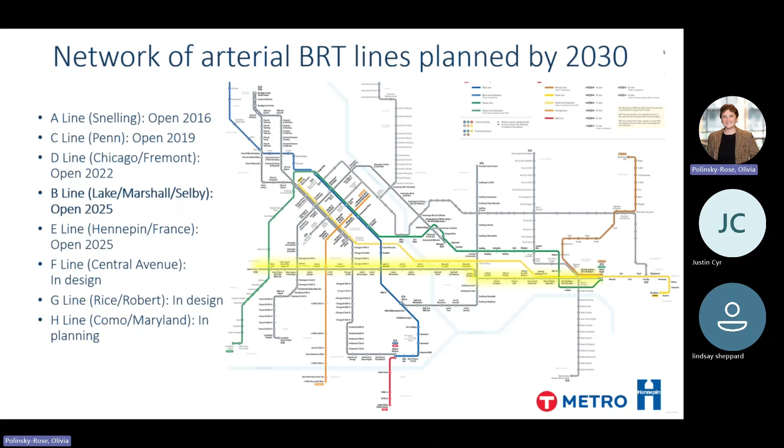You're probably familiar with Arterial Bus Rapid Transit, or ABRT, but here's a quick overview: a network of high frequency, high quality transit, improving service on our highest ridership corridors. The B Line is our seventh BRT route. It opened in June of 2025, connecting to an additional 7 metro routes, including the Green and Blue Lines, the E Line that opened in December, and more. ABRT improves our local service by increasing the space between stops, with 2 to 3 stations per mile, so you're stopping less frequently, spending more time moving and less time at each stop.

We implement comfortable stations that have shelters with light and heat. They have seating, real-time information, which helps people—makes your wait feel shorter when you know when the bus is going to come. And then we have off-board fare collection and nearly level boarding, along with all-door boarding, which allows people to walk right onto the bus, again contributing to less time stopped, more time going.

In addition to all of that, we work with our local partners, such as Hennepin County, to implement transit signal priority along the routes and bus lanes where possible, again helping to keep us out of traffic and keep both traffic operations and transit moving smoothly, getting everyone where they need to go more quickly.

The B Line improves service on what was our highest ridership local route, Route 21. It had been at about 7,500 riders per day. It's increased by more than 20% since then—definitely over about 8,200 riders per day since I last checked, and probably even higher since then.

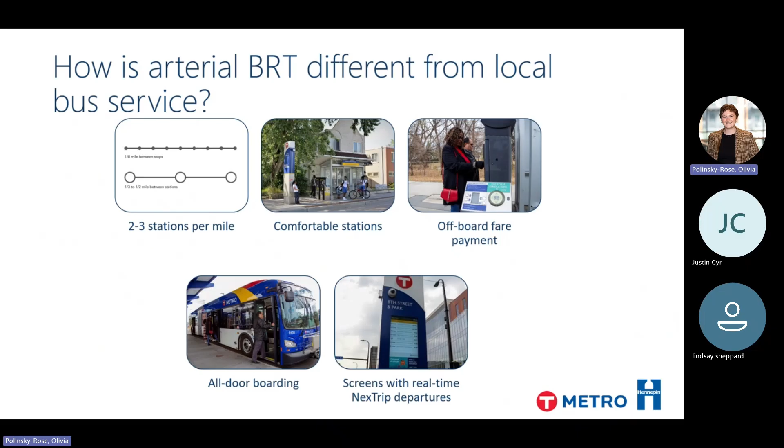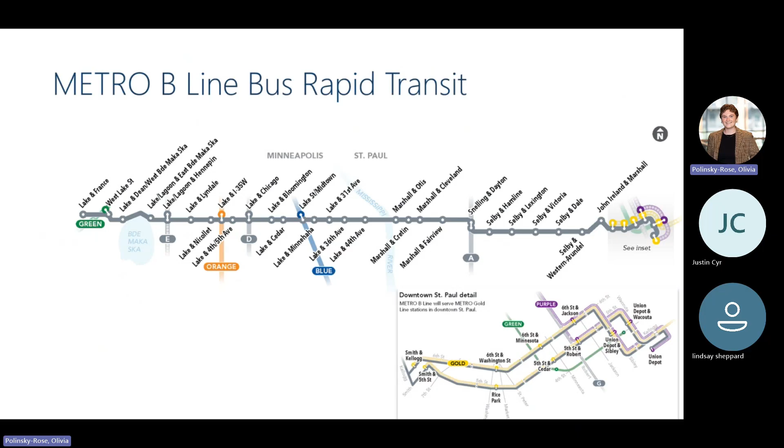It is a 13-mile route with 33 stations, connecting from Lake and France at the edge of Minneapolis across to downtown St. Paul, traveling along Lake Street, Marshall Avenue, and Selby Avenue. Six of those miles, 13 stations, are on Lake Street, and that's where we teamed up with Hennepin County to make some local improvements alongside the B Line.

And with that, I will hand it to Justin. Thank you.

Thank you. Justin Cyr from Hennepin County. Curious who's worked on this project in the last couple of years? Fair amount of you—thank you for all your help on this. If there's any traffic modeling, I'm going to turn right to you to answer it. So you didn't know you're going to be part of the presentation, but you will.

Metro's B Line had a project along Lake Street. The county had some issues we were trying to address for this corridor, which had been reconstructed within the last 10 to 15 years. So it was about how we could make some spot improvements for a better corridor. It was not time for a full reconstruction of this corridor, so we're trying to preserve and modernize. It's getting time for maybe a mill and overlay for some portion of it—improving safety, reliability, and comfort for all.

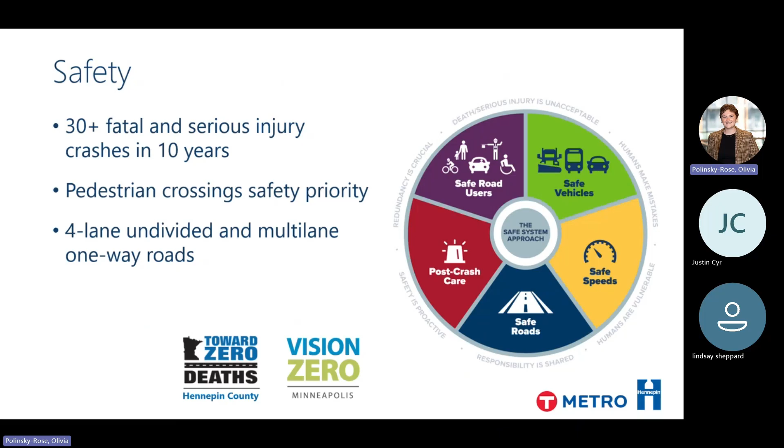So you're very familiar with the safe system approach, I'm sure—those are some of our guiding principles. Some key safety countermeasures we're looking at are 4 to 3-lane conversions where we could do that, pedestrian refuge islands where we could fit those, and curb extensions and bump outs. So where can we get these put in strategically along the corridor to help with those pedestrian crossings?

Our climate action plan is to reduce vehicle miles traveled throughout the county, advocate build out of planned transit routes and development of new routes. We're very much partnering with Metro Transit on that, and preserve and modernize our road system.

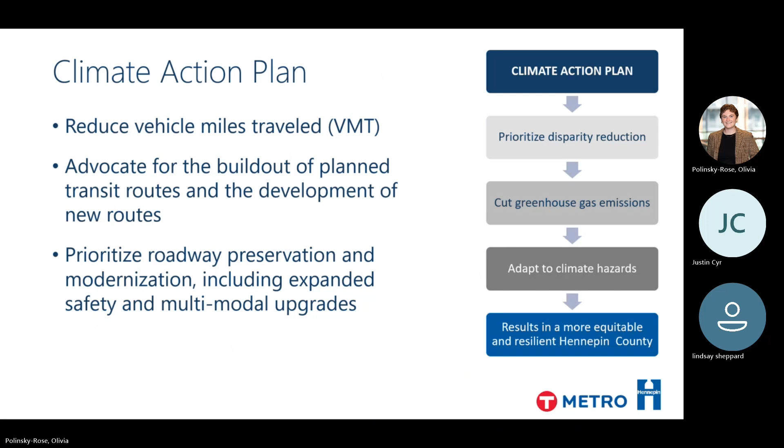On disparity reduction, as you can imagine, the county is a huge entity—it's not just transportation, it touches your life in many ways you don't even realize. Our part of that, transportation, is connectivity—so technology, transit, transportation systems are accessible, affordable, and climate friendly.

So our Lake Street approach is to find a technical solution that addresses safety needs, improves bus speed and reliability. We want to try to improve the transit times for buses going along this corridor, and address asset needs. Like I said, we didn't want to do a full reconstruction, so where can we make those updates without a full reconstruction?

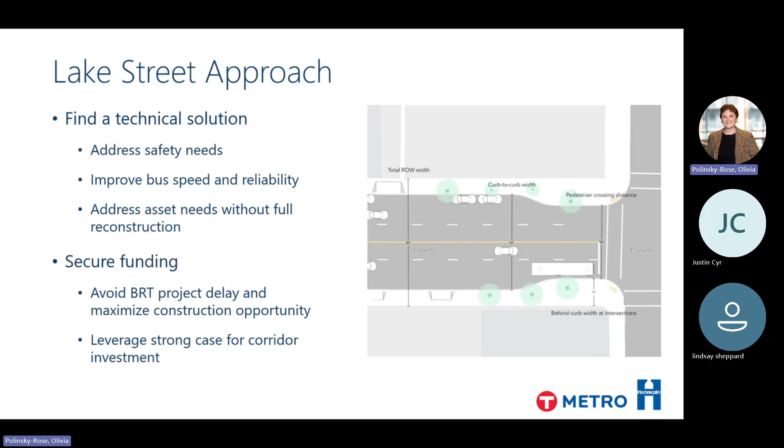We didn't even have this project in our CIP. So with the B-line coming along, how do we bring this into our CIP and not delay the B-line? There were a lot of applications to try to get additional funding, and a lot of coordination between all the different agencies. This is a generalized look of what the Lake Street corridor was—4 lanes, 2 lanes in each direction, a lot of parking—that's the way it did look.

Some of the alternatives that Michael was looking at modeling: can we reallocate a lane in each direction for buses, have dedicated transit-only lanes in both directions, but then we would not have any left turn lanes?

So, just 1 lane in each direction. That ended up not being a very successful scenario.

We looked at keeping a 3-lane section and then eliminating parking along the corridor. That was not a scenario that was well received, so that one got taken away.

So what we ended up with is kind of a 3-lane section, reallocating 4 lanes into 3 general purpose traffic lanes, with the 4th lane being a transit-only lane. Through the traffic modeling, we were trying to figure out where are the most logical places to have that transit-only lane that gives us the best advantage. So sometimes it's westbound and sometimes it's eastbound.

There was a lot of coordination between all the agencies to see where that transit will get advantage, without horribly impacting vehicle mobility. We were anticipating over time that there would be a reduction in traffic just with mode shift, so there wasn't a big projection of increase of traffic with this modeling. And then we were able to keep the left turn lanes where they're needed.

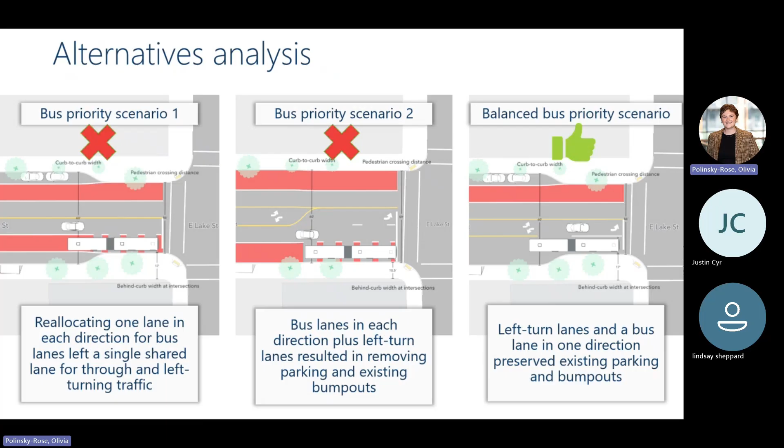So then we were like, okay, we got a project and it's this much money. How do we fund this? So we did a RAISE grant.

In '22, I think it was—boy, that time flies—and it was apparently a very successful one, one that the US DOT wanted to promote. So we have the DOT person, Pete, and then our county commissioner coming out of the bus there, and it was well received, well publicized that we received this grant.

And so we also then applied for regional grants, the regional solicitation, HSIP. I think my next slide gets there.

So we got $12 million for RAISE. We got $2 million for HSIP, $2 million for STIP. And then the state had IIJA match for the RAISE grant, so we were able to cover our 80-20 match with an IIJA match. And then we had state aid, Minneapolis had some local funding, and then Met Council also provided a little bit of funding for the Lake Street portion. So there's a total of $30 million for this project that we didn't even have in our CIP.

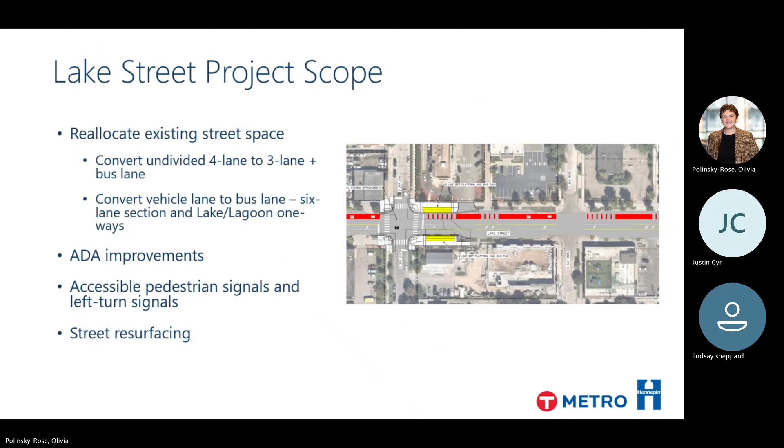So for project delivery, we went from a B-line planning environmental study and a Lake Street safety improvement effort, and it merged into one project that was led by Metro Transit to construct.

We wanted to not delay everything, so we split it into 2 different packages. We had an east package that got constructed in '23, and then a west package in '24.

And so all the funding, all the NEPA—if you're familiar, NEPA for FHWA is not the same as NEPA for FTA, so making sure those 2 documents work well together is a lot of coordination. And last June, it opened, and I will transition back to you.

Yeah, so this graphic just kind of shows how we divvied up the construction on each. We were able to do the east package work while we were still finalizing the west package design. That helped keep the B-line on schedule.

We did ultimately delay our opening by 6 months to make sure we had enough time to get everything done, and not pay a bunch of money for contractors to be incentivized to meet a December start. But on the whole, it allowed us to build a project that provided much broader community benefits—traffic safety, pedestrian safety, transit priority—without too much impact to our schedule.

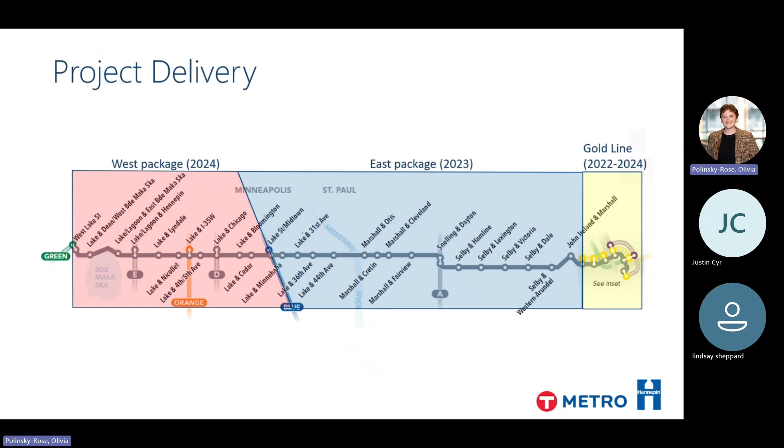So it successfully launched in June, and we've had huge growth in ridership since then. But in the 2.5 years we were doing construction, we did have to do a lot of community engagement because of the scale of work, the impacts to traffic, and the impacts to business. You can see high level numbers on what we did.

Beyond community event attendance and door knocking, we were doing a lot of direct engagement with businesses. Something we include in our contracts is that our contractor needs to coordinate with businesses when they're going to be impacting access. People don't always follow it, but we were fortunate to have a proactive contractor who kept the same team from East Package to West Package, so they were familiar with the context and didn't need onboarding. They were really good about going to businesses and saying, hey, we're going to be replacing a catch basin or rebuilding your sidewalk, when can we do this to make it work?

There was one business that was going to have a big weekend event, so they coordinated to redo the sidewalk in advance of that event, instead of leaving it torn up or old while they were hosting people.

Another example is we were replacing a catch basin next to a restaurant, which again required tearing up the sidewalk and part of the road. They coordinated with the business to do the work on a Monday when it was closed, so it wouldn't impact access. It was great to have that proactive, community-focused communication from our contractor. It made life easier for us and better for the community, showing that we are dedicated to supporting local business in what can be a challenging time.

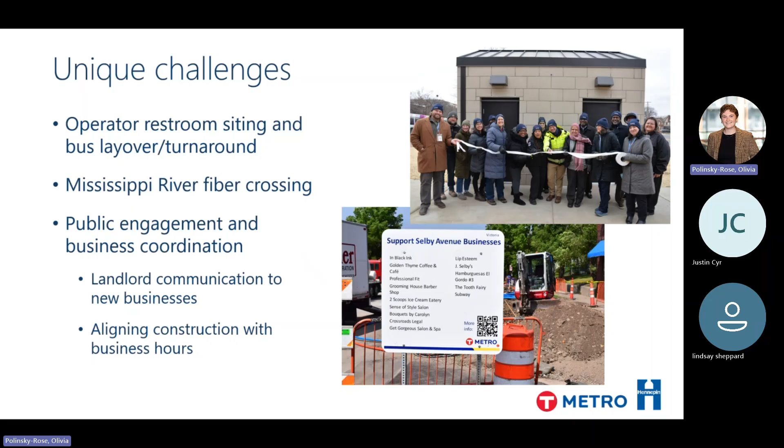So building networks with business associations like Lake Street Council was really valuable for us, helping to get that communication with individual businesses. That, and just having our outreach coordinators out there on a regular basis so they could keep an eye out for that kind of business turnover, and we could establish connections to make sure everyone knows what's going on, was really helpful for us in maintaining good relationships and supporting our community through construction.

I really like these two photos. They just show some of the context of the station. While the Lake Street piece was a huge part of the project and really did a lot for the Lake Street corridor, we also built 27 stations, and that context ranges a lot. The photo on the left is the station at John Ireland and Marshall. It's part of the Capital Area Historic District, right outside the St. Paul Cathedral. So that's one type of context.

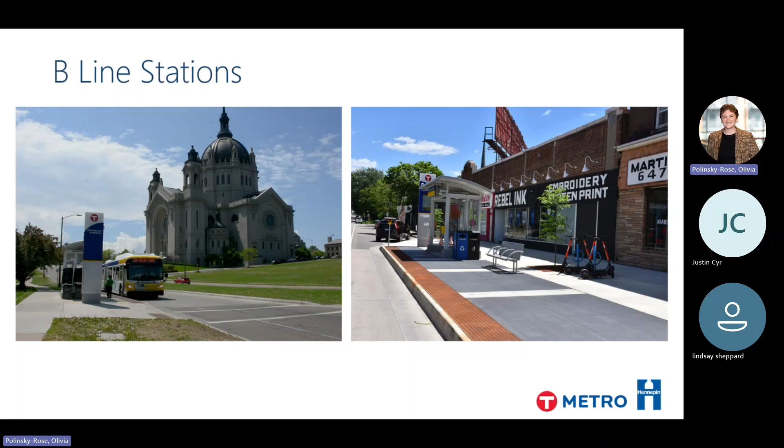And then the photo on the right is a station that's right outside a business, with on-street parking, door fronts right at the right of way - a very different context. So trying to apply a typical BRT station to many, many contexts is one of the design challenges of the project.

This is a piece on Lake Street that came into the scope pretty late in the project - a two-way bikeway that was added on Lake Street between Bde Maka Ska and Humboldt Avenue. This was a piece where the city's long-term bike plan identified a bicycle connection in this area. The existing street, in the one-way section of Lake and Lagoon, had three driving lanes, two parking lanes, and it was 60 feet from curb to curb. So really pretty wide, and the speeds were, as you might expect, pretty high.

This was an area where it's a little hard to tell in this photo, but the curbs mostly stayed in place, and we were able to add a curb protected 2-way bikeway, as well as the transit lane, and retain parking. This is a heavy residential and business area, so it was really a win-win in terms of being able to make that bike connection, but also retain some of the things that were important to the people who live and have businesses in this part of Uptown.

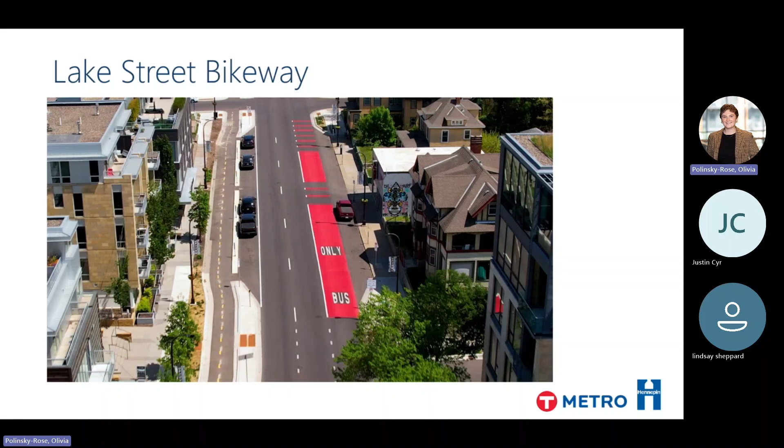We do have a couple of queue jumps on the corridor. These are typically where the bus lane ends and a bus needs to merge back into the through lane of traffic. We have transit signal priority on every signal on Lake Street, but there are still times when the bus might arrive on the red. So that's the situation you see here: the bus arrives on red, there are vehicles queued in the general purpose travel lane, and that bus needs to merge over, which can result in some transit delay.

So we use a queue jump signal, which is this little white bar right there. It's sort of like an LPI in that it gives the bus a head start to get ahead of the rest of traffic. When that bus is detected at the stop bar and receives the vertical bar, the bus can jump the queue of vehicles, and then other vehicles get the green right after that.

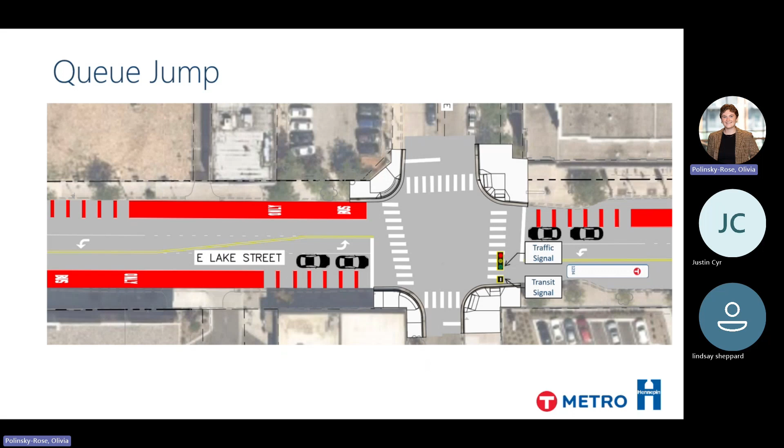As part of this project, we implemented 7 lane miles of red bus lanes. That was a 450% increase of red bus lanes in the Twin Cities Metro, so it gave us a lot of opportunity to develop and refine the standard application. What is the material? What is the skid resistance? How do we want the pavement messages? Counties, cities, and MnDOT were all part of that process to fine tune it, and MnDOT actually helped us with skid resistance testing after the markings went in.

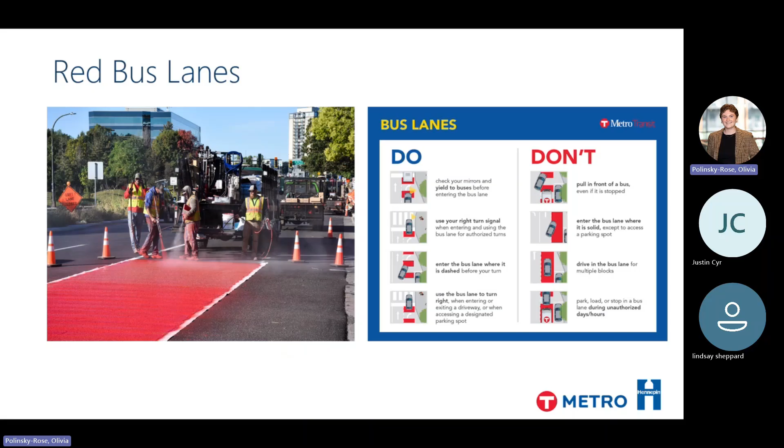With the significant expansion of red bus lanes in the region, we also developed public information to help people understand how to use the red bus lanes, when you should drive in them and when you should not. So that was part of the project as well.

And then finally, some of the numbers that explain the magnitude and impact of the project. As part of the B-line, our project designed and constructed 27 BRT stations. We had 236 pedestrian curb ramps, 7 lane miles of bus lanes, 31.5 lane miles of mill and overlay—almost all of Lake Street was milled and overlaid, which was part of what the county's portion of the project brought forward. There were also 18 median refuges and curb extensions that were new, a quarter mile of new curb protected 2-way bikeway, and 55 traffic signal updates associated with the 4-to-3 conversion as well as TSP implementation. So we touched almost every single intersection on Lake Street, in addition to all the work in St. Paul as part of this project.

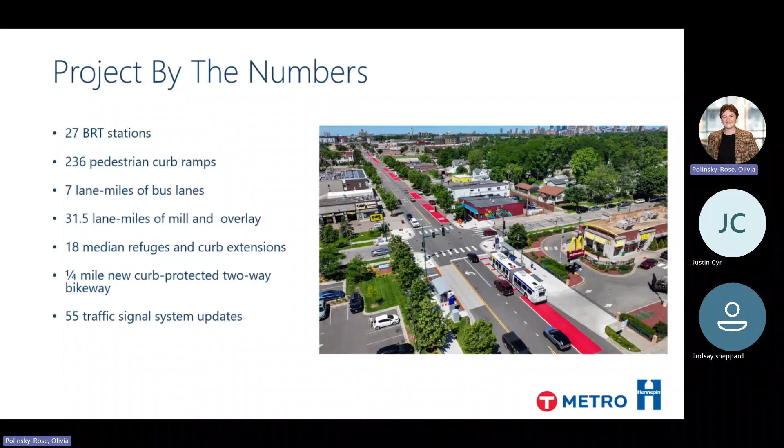Last, I wanted to mention that I think this project was really successful because both Metro Transit and Hennepin County were really committed to the partnership and to making it work. Jason mentioned this project was not in the CIP—that was a big hurdle. Once the county had all of the federal money, which was all FHWA money, they handed that money over to Metro Transit. That's a lot of trust, because Hennepin County is giving that money to Metro Transit to administer, and then Hennepin County is getting reimbursed. That's not something you see every day, but it was a really strong partnership that worked throughout the project, and without that, it just would not have been as successful as it was.

So with that, I will stop and we can answer any questions people have.